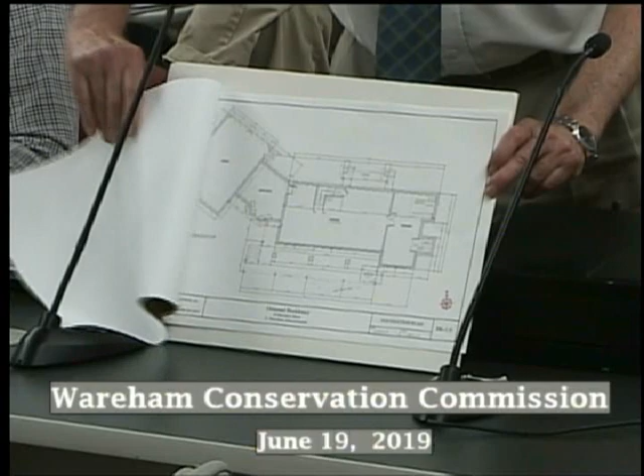All the rooms are lined up to take advantage of the water view available in the front. So the house ends up fairly long, but you want your kitchen, dinette, dining room, living room, and master bedroom all in a row, to give you that view for aging in place, living into hopefully the next 20 or 30 years.

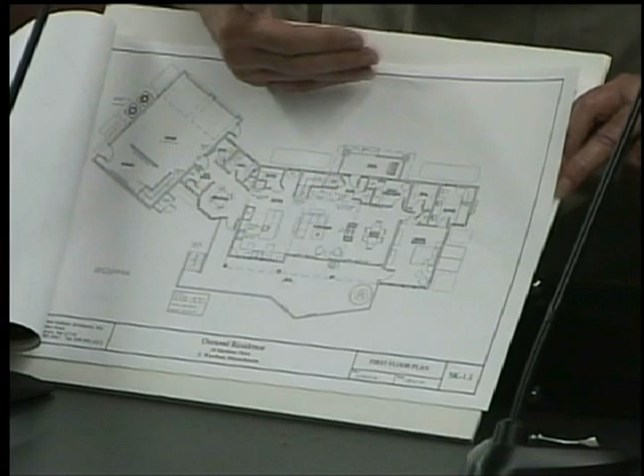There's a deck across the whole front of the house, and this prow of the deck is behind the existing cottage. Everything is behind the existing cottage in an X zone. It's not in a flood zone, it's in an X zone.

The couple have 2 grown children and hope to have a lot of grandchildren. So the second floor has a second master bedroom, a kid's bedroom, and 2 bathrooms, for about 800 square feet on the second floor.

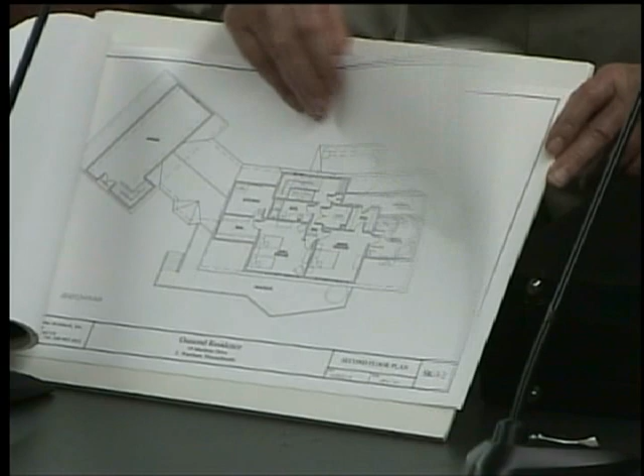The house is 27 to 28 feet tall, so it's not a huge structure. It's basically a Cape-style house, and it's also going to be as close to net zero as we can get.

It's got 10 kW of solar panels on the roof on the south side, which should take care of all their electric needs. Most of their stove, heating system, and hot water system will be natural gas. So we hope to get the electric to net zero, and their only bill will really be gas, nothing for electric.

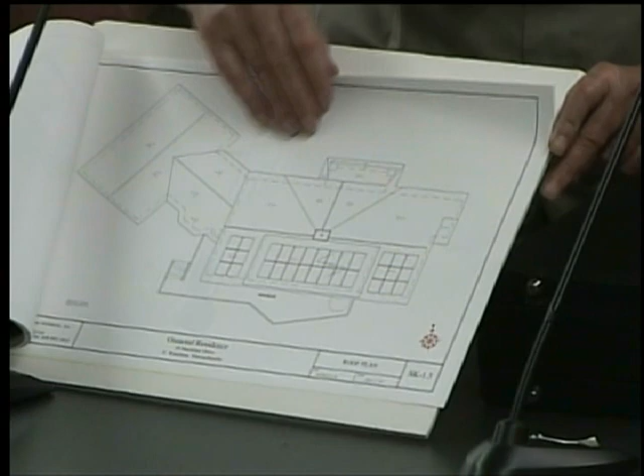In the future, we hope to take the 10 kW system and add a Tesla battery system, so we'll get 16 hours of use out of the solar PV instead of just 8 to 12 hours you'd normally get.

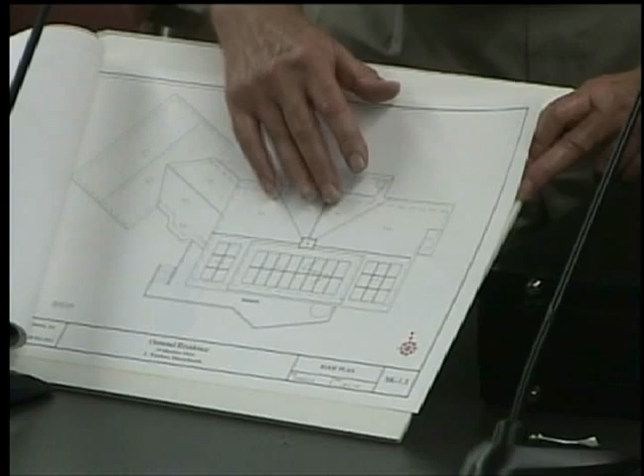I'd like to pass this out to everybody and read it into the record. We have this already in our mail. Can I read it into the record? Sure, go ahead, Mr. Smith.

Dear Commissioners, we recently met with Gary and Karen Osmond and their planned project at 18 Maritime Drive in Wareham. We are abutters living directly across the street from the site. Plans involve removal of the existing structure and construction of a new house with necessary setbacks. They have expressed their respect for conservation and developed a project that we feel would complement our neighborhood. We are hopeful that their plan is compliant and the existing regulations will be approved. Sincerely, Thomas L. Gleason and Catherine C. Gleason.

Thank you. Any other comments? Yes, I'm Maureen Thomas, Buzzards Bay Coalition.

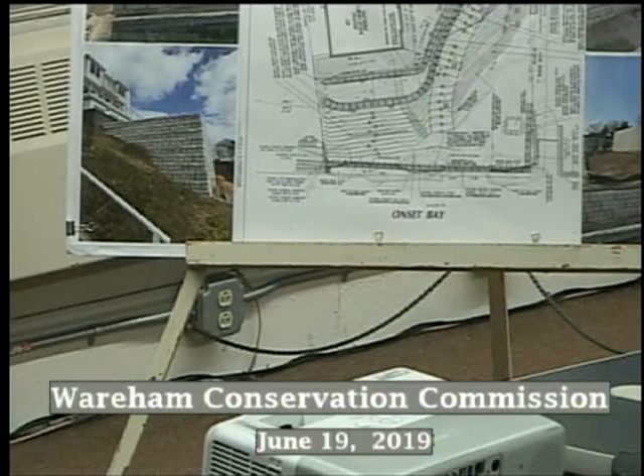What we're talking about in that lower view is the top 4 blocks - this piece right here, which was basically added on to the bottom row of blocks from what we can tell. We haven't done an as-built survey of it, but that's what the photos show us. We came to a right angle wall because we could not put in the curved wall that was on the plan. That's correct.

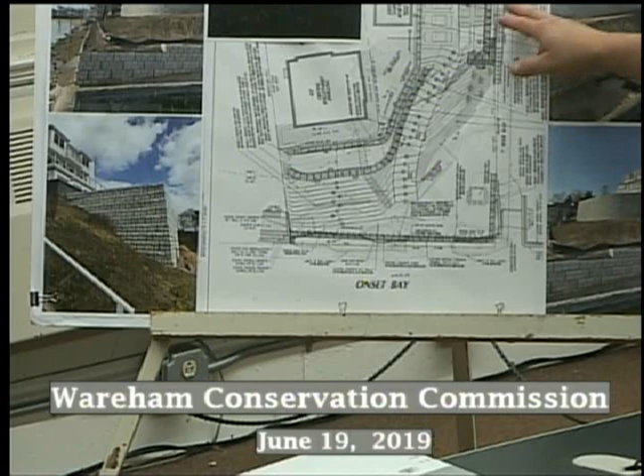So the lower wall, the seawall, appears to be in compliance as far as location and height. That's the upper part - the piece in the corner is what you see in this location. The ramp is consistent with the plan, and the lower wall, the two-tiered wall, is approximately in the right location from what I'm gathering. I haven't done any measurements though.

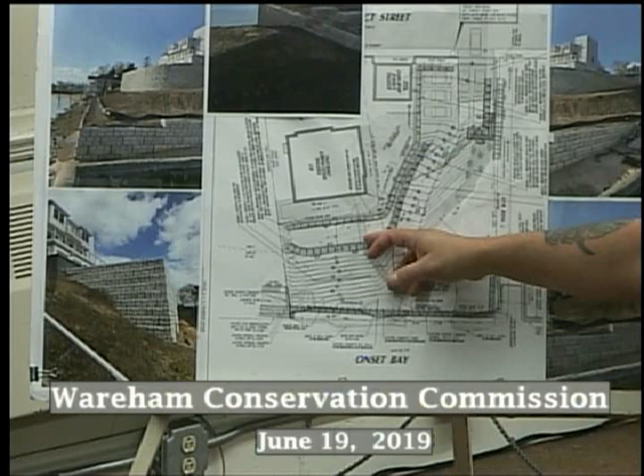We have the middle wall, and we're supposed to have so many feet of lawn, gravel, plantings, et cetera, and then another wall - a lawn platform here. Instead that lawn platform is at a 6-foot higher level. But I'll point out that's at elevation between 25 and 31. The velocity zone is VE 20, so we're well above the base flood elevation. There really is no impact to the resource area - this is an improvement to what was there.

Well, there has to be something said about how many feet in front of that house you added by building the middle wall all the way up to the top, as opposed to building the top wall separately. Did that come out right? Yes. I think - how many feet did you add to the front of this property by building the wall that way?

Five feet? I didn't do any measurements, but the end result is the same square footage of lawn. It's just, instead of it being at elevation 25 and a half, it's up at elevation 31. But it's a different usable piece of lawn than what you had planned. Correct, yes. I won't disagree with that.

But the wall as built complies with the performance standards for the Wetlands Protection Act. This isn't a bank that feeds the shoreline with sediment. This is the other category where we had a seawall there, and this was a permitted wall.